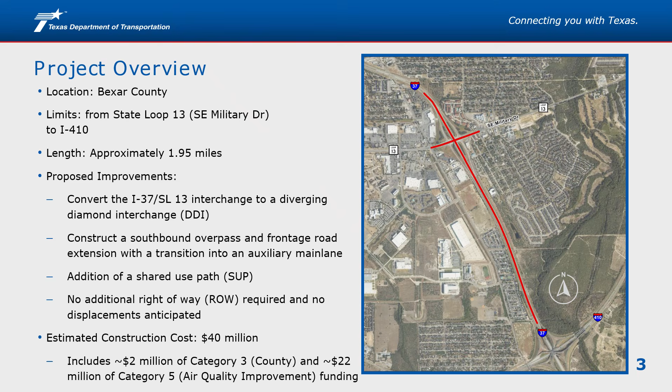The proposed project is located in Bexar County and would include work on approximately 1.95 miles of I-37 and approximately 0.4 mile of Southeast Military Drive, also known as State Loop 13 or SL13. This project proposes to reconstruct the existing interchange to a diverging diamond interchange, add a new overpass over the interchange, extend the southbound frontage road with a transition into an auxiliary main lane that would end at the exit ramp to I-410, and add shared use paths, or SUPs, which can be used by both bicyclists and pedestrians. No additional right-of-way would be required and no displacements are anticipated. The project is anticipated to cost approximately $40 million to construct and includes funding from Bexar County and from the Federal Air Quality Improvement Program.

The goals and objectives for this project are to improve traffic operations at the I-37 and SL13 interchange, alleviate congestion due to increasing traffic, and improve mobility and safety throughout the project area.

A traffic analysis was performed to analyze the impact of the proposed improvements on traffic flow. Impacts to travel time, or the time it takes to traverse a route between any two points, was investigated for this study. Travel time is an indicator of congestion levels and performance of a transportation system. Travel time, reported in seconds, was determined along the I-37 corridor from just south of Pecan Valley Drive to a point north of I-410.

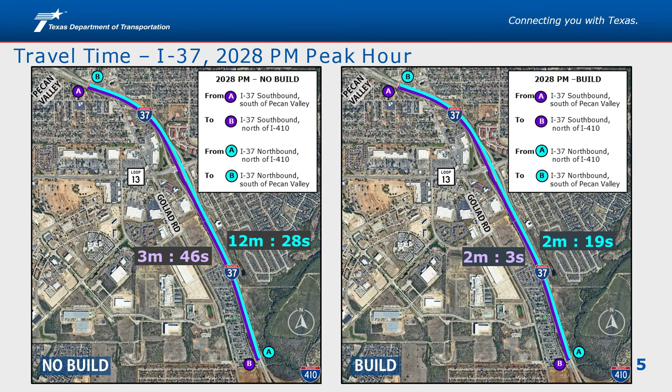Travel times were determined in the northbound and southbound directions for 2028 with and without the proposed project improvements. It is expected that the project improvements will reduce travel time by about 46% for drivers traveling southbound along the I-37 project corridor, and by about 81% for drivers traveling northbound.

To analyze the impacts of the DDI on traffic flow through the I-37 and SL13 interchange, travel time was determined for two key routes: between the I-37 southbound main lanes and SL-13, and the I-37 southbound main lanes and Goliad Road. Traffic flow through the I-37 and SL-13 interchange is expected to substantially improve with the DDI, allowing drivers to travel through the interchange with minimal delay. It is expected that the project improvements will reduce travel time by about 90% for drivers traveling along the two key routes shown.

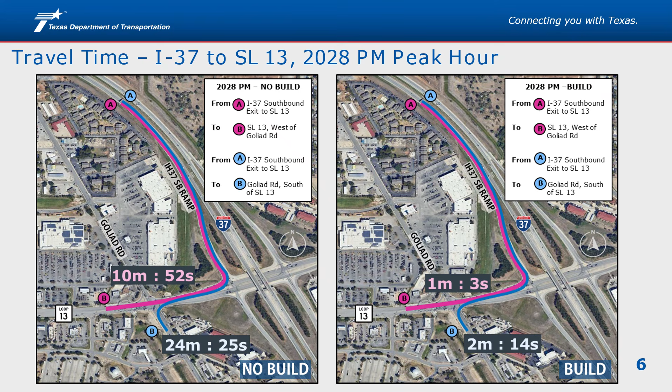An assessment of the safety conditions was conducted to understand the needs of the project corridor and identify potential improvements. The crash hotspot map shown is a visual representation of the frequency of reported crashes along I-37 between 2019 and 2024. There were 3 reported fatalities and 11 crashes that resulted in serious injuries within the I-37 project limits. The highest frequency of crashes are noted at the I-37 and SL-13 interchange.

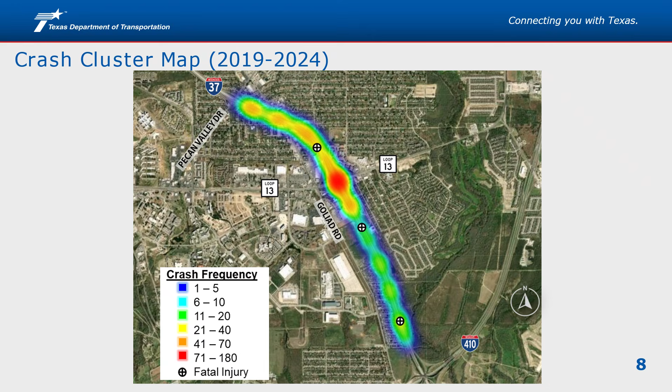Considering the results of an alternative analysis, TxDOT is proposing to convert the existing interchange of I-37 and SL-13 to a diverging diamond interchange, or DDI. A DDI temporarily moves crossroad traffic to the opposite side of the road within the interchange. This allows greater ease in accessing or exiting from I-37, improves traffic flow, and improves safety by reducing conflict points.

This slide shows a still image from a fly-through visualization of the proposed project, which can be viewed on the TxDOT meeting page or at the in-person open house. More information on DDIs, as well as other types of innovative interchanges, can be found on the TxDOT website using the URL shown on this slide.

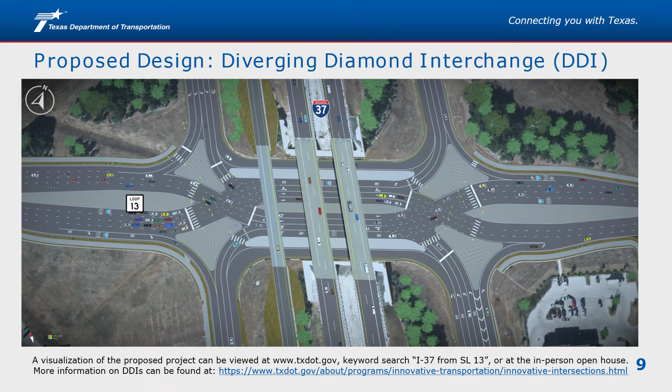This slide presents the existing and proposed typical sections for I-37 south of the SL-13 interchange. The project proposes a southbound frontage road between SL-13 and a relocated southbound entrance ramp, as shown in the second typical section. Additionally, an auxiliary lane is proposed for I-37 southbound between the relocated entrance ramp and the existing exit ramp to I-410, illustrated in the third typical section. No additional right-of-way will be required for this project.

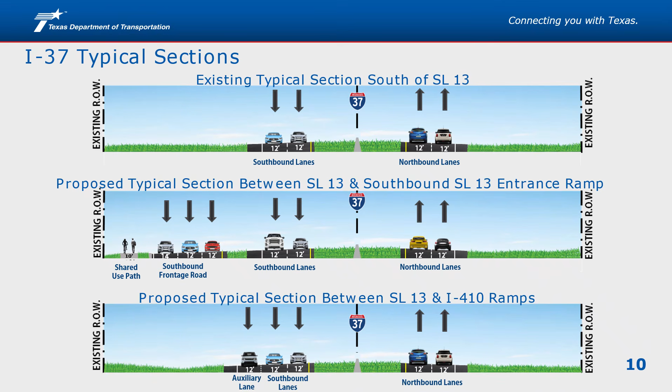The proposed DDI will be built within the footprint of the existing interchange at I-37 and SL-13, as noted in the existing and proposed typical sections shown in this slide for SL-13 at the I-37 overpass. The DDI will move SL-13 traffic to the opposite side of the road within the interchange.

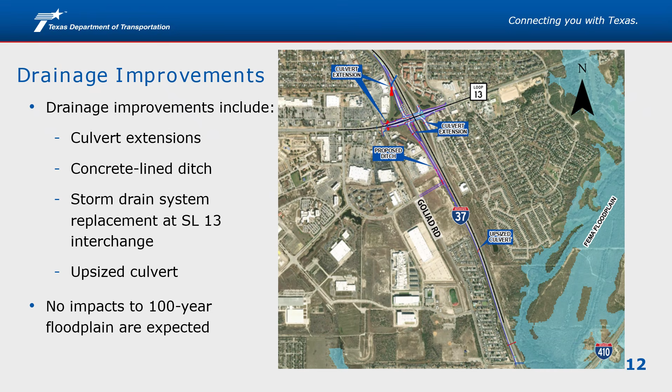The drainage impacts of the proposed project improvements have been evaluated. Based on the drainage analysis, no significant impacts are anticipated within the project area or the 100-year floodplain. The proposed drainage improvements include culvert extensions near the I-37 interchange and Goliad Road intersection with SL-13, a concrete lined ditch along the proposed southbound frontage road, replacement of the existing storm drain system at the SL-13 interchange, and an upsized culvert near the southern end of the project.

The environmental studies conducted for this project are underway and will comply with the National Environmental Policy Act, or NEPA, process. NEPA requires federal agencies to evaluate the environmental and related social and economic effects of their proposed actions prior to making decisions and to provide opportunities for the public to review and comment on those evaluations.

The environmental studies will identify and assess potential impacts to the natural and human environment, including air quality, traffic noise, land use, geology and soils, biological resources such as vegetation and threatened and endangered species, farmlands, water resources, hazardous materials, community impacts, historic and archaeological resources, and protected lands such as parks. The results of these studies will help the project team make informed decisions as the project design progresses.

The environmental review, consultation, and other actions required by applicable federal environmental laws for this project are being carried out by TxDOT pursuant to 23 U.S.C. 327 and a Memorandum of Understanding dated July 17, 2025, and executed by FHWA and TxDOT.

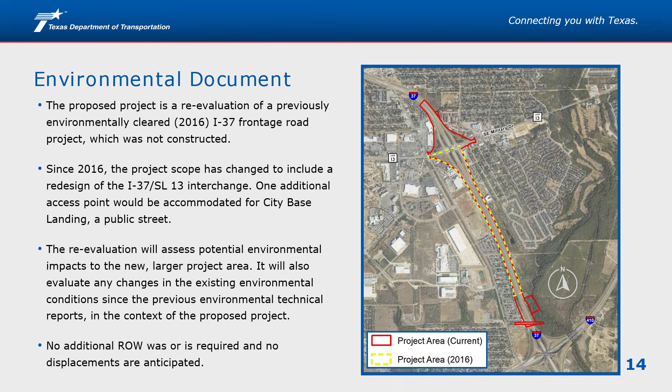Responses to comments received during the comment period will be included in the open house summary report that will be posted on the TxDOT meeting page when completed.